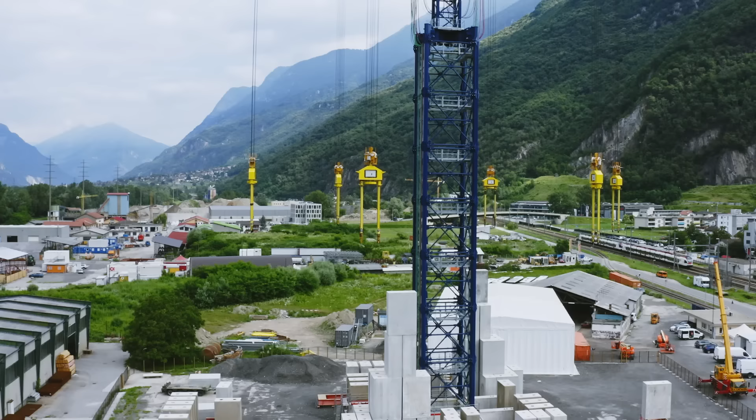We really wanted to innovate in a way so when you combine with wind and solar, you could actually be competitive and even cheaper than fossil fuel. And this really drove a lot of our innovation to come up with a combination of conventional physics technology for speed with some of the latest innovations in AI, software, and material science to create an energy storage breakthrough.

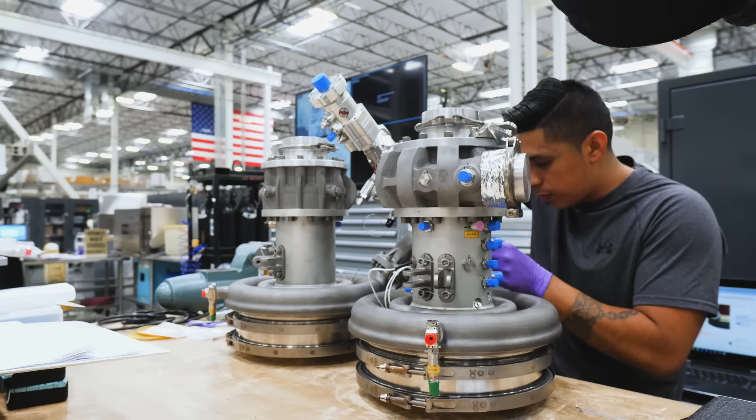A global technological revolution is underway. We think in the next 10 years, you'll see more innovation than we've seen in the past 50. Driven by passionate, dedicated individuals intent on shaping a new world. I want to create something new. I want to create something that gives me the sense of creating new life. This is why I'm here.

A greener world. This is the last call to action, that we have to develop the solutions that are protecting our planet. A better world. I have a family, and when I think about the life I want them to have and their children to have, I want them to experience the world where they can travel and live without worry, and that gets me up and going every day.

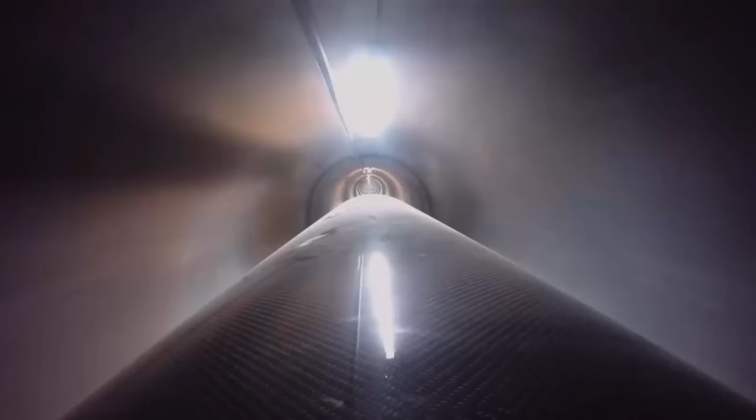Together, they are pushing engineering to its limits. Human creativity is the most tremendous power, and if you set a target, things that you never thought possible become possible. Creating extraordinary machines that can help the planet and humankind in the future.

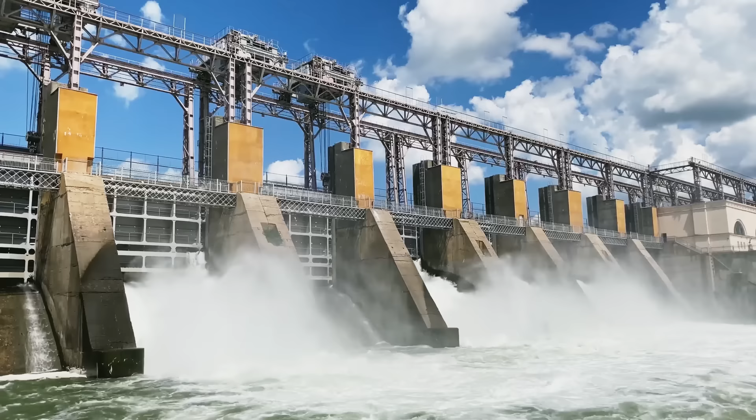Engineers are transforming the way we power the world, replacing old carbon-intensive technologies with clean, renewable sources of energy. And the speed of change is unprecedented. The energy transition that's happening at the moment is a complete paradigm shift.

Rather than big, centralized thermal generation, burning coal, burning oil, burning gas, we're now decentralized, solar PV all over the place. Wind and solar, which are now commonplace, really, they were almost non-existent. They were just a minority thing 20 years ago. But the meteoric rise of renewable energy has consequences for our electricity supply.

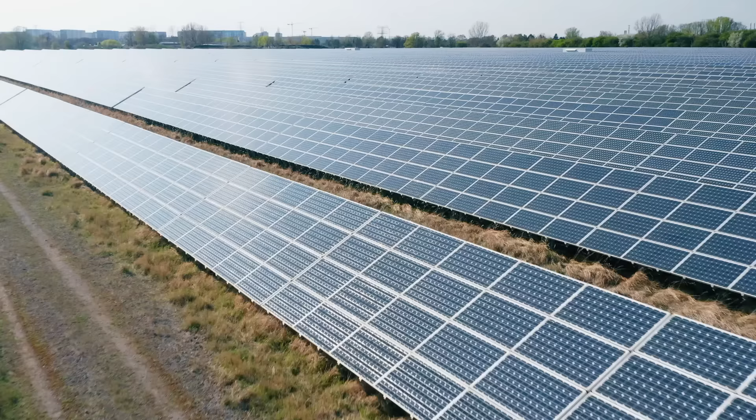While coal and gas-fired power stations can generate electricity whenever you need it, renewables are intermittent by nature. So we need a backup plan for when the wind stops or the sun goes down. So the solution to intermittent power provided by renewable energy is to provide power quickly using energy storage devices.

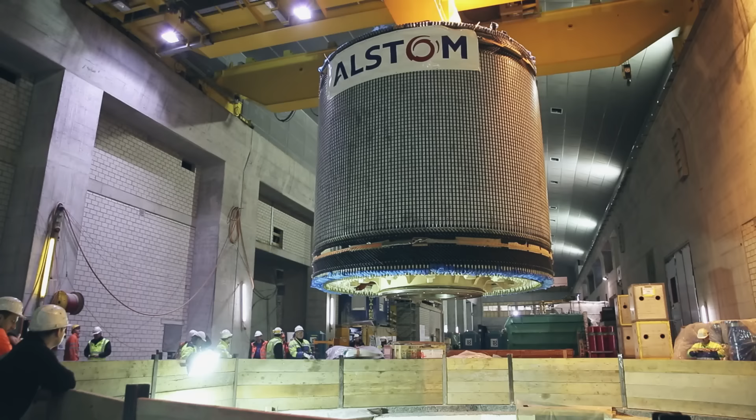Teams of engineers are searching for ways to store green energy with mechanical batteries, so that when extra power is needed, these devices can bridge the gap instead of relying on more polluting sources of electricity.

The ultimate solution really is to have much, much more energy storage built into the grid, so that at times when there's a surplus of energy, such as when the wind's blowing very strongly and the sun is also shining, one can save energy and store it. We're going to need a lot of innovation for new technologies to be able to store this energy so that renewables can generate and we can utilize that when the grid needs it, when the demand is.

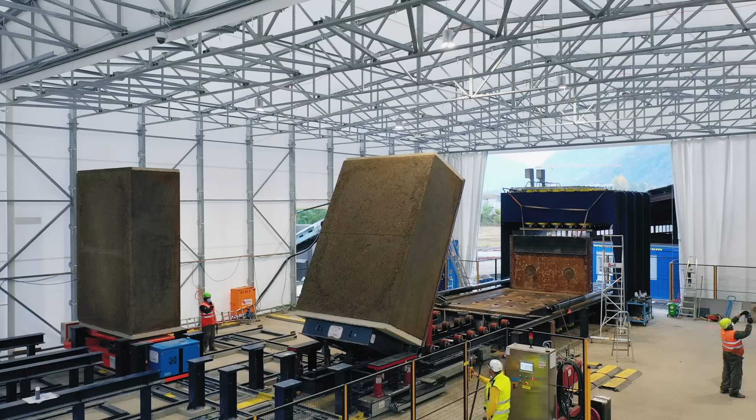The success of the green energy revolution depends on these engineers and their marvelous machines. If we were to keep increasing the amount of renewables on the grid, but we didn't implement energy storage at the same time, our grids will start to get unstable. We'll start to have more and more frequently periods where power wasn't available to us. Already, there are ominous signs of what a future might look like without enough energy storage.

In August 2020, California was about to experience a glimpse of this potentially devastating future. The most extreme heat wave of recent decades was wreaking havoc on the western United States. Elliot Mainzer, CEO of the California Independent System Operator, was paying close attention to the weather.

August of 2020 saw a heating event that hadn't been seen in many, many years. It was simultaneously extremely hot in just about every part of the western United States, with temperatures well into the 100 degrees in California and in many parts of the region. It was what we've referred to as a heat dome that sat over basically the entire western United States.

Then, sweltering Californians were suddenly confronted with another rare event. From 6:30 p.m. on the 14th of August, their electricity was suddenly cut off. It was the first time that California had experienced any types of rotating outages from a shortage of electricity in 20 years. This shortage may seem surprising, as California has invested heavily in green energy generation.

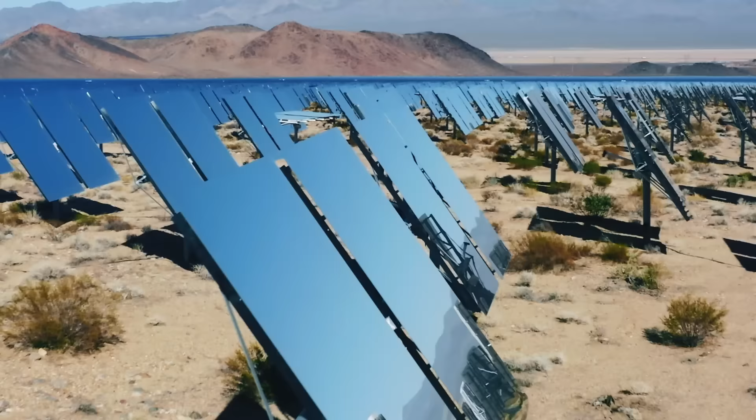In fact, during the spring, they have so much solar power, they export it to neighboring states. California is, first and foremost, very blessed to have a very significant solar energy resource. We have over 15,000 megawatts of solar operating on the high voltage grid, and also behind the meter, a lot of rooftop solar in California.

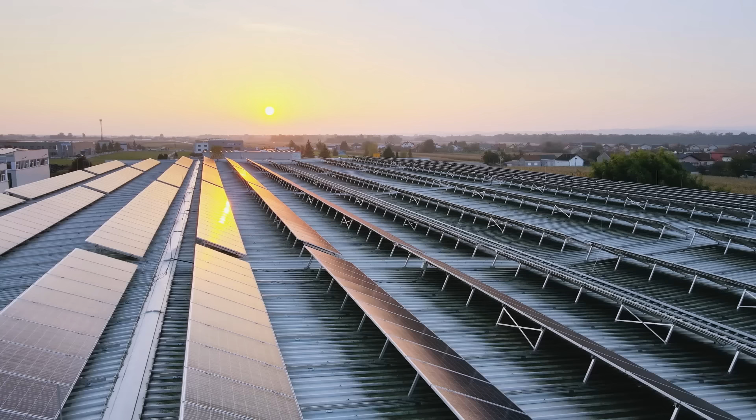So, with enough solar panels to power nearly every household, why did California run out of electricity during a heat wave, when there was plenty of sunshine? The answer was all in the timing. As the sun went down, power-hungry air conditioning systems stayed on, so the supply of solar power fell while demand for electricity remained high. In the evenings, California often imports surplus electricity from neighbors, but this time, they couldn't rely on other states.

It was so hot in these other areas that they needed that electricity for their own customers and didn't have as much surplus to sell into California. And that put us into a really stressed situation during a time of the day when we simply don't have enough capability to ride through those types of conditions. Planned energy shutdowns were the only solution. The result was hours of blackouts for 2 days, affecting nearly 500,000 people.

If California could have stored more of the solar power generated during the day to use in the evening, the crisis could have been averted. When solar panels produce more electricity than is being used by homes and businesses, the surplus energy can instead charge batteries. Then, when solar panels are generating less power than is needed, the batteries can discharge their electricity to the grid, making sure there's always enough for everyone.

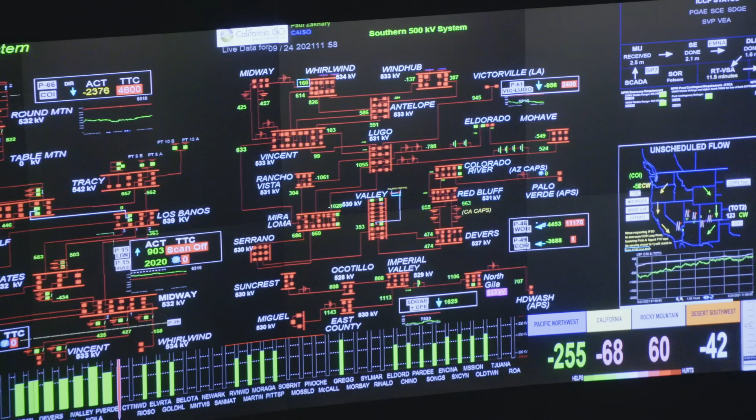Since the blackouts, California has been investing heavily in batteries, but that won't be enough. Today, the primary battery storage resource on our grid are 4-hour lithium-ion batteries. And they are going to continue to grow in scale and scope here in California. But they are not going to be sufficient on their own to carry all of the load of the transformation. The state's capacity has increased tenfold to 2.5 gigawatts. But Los Angeles alone uses 6.5 gigawatts. And lithium batteries can't provide power for long enough to get through the night.

We are going to need longer duration storage. You want a diversity of supply. You don't want to have such a dependence on a single technology. California is ahead of the curve. But all over the world, renewable energy is growing fast. Without a revolution in energy storage, the world faces mass blackouts.

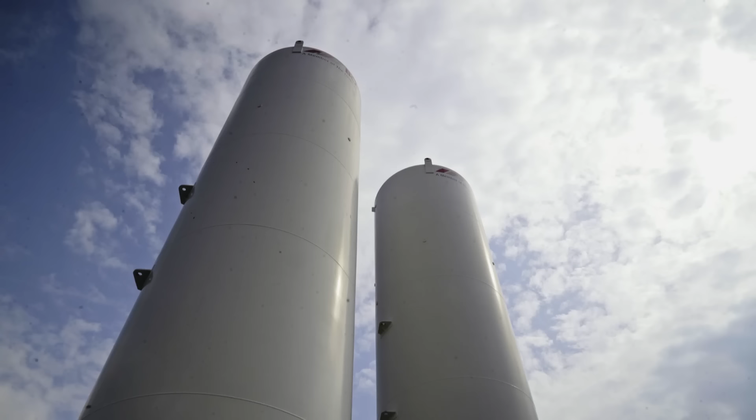Electricity grids need energy storage that is cheaper than fossil fuels to be competitive. They need them to be long-lasting to provide power for days or even weeks. They must also be fast-reacting to respond rapidly when the demand spikes. But above all, they need to store vast amounts of energy to help the world switch over to renewables.

One nation that's attempting to build a giant energy storage system is Switzerland. The Alpine country boasts over 600 hydroelectric plants. But this know-how in capturing energy from water is being taken to the next level here at Limmern Dam, to build a huge water-powered gravity battery known as a pumped storage plant. Deep inside the mountain, a turbine hall will connect Lake Limmern to Lake Muttsee, 1.5 miles above sea level. A 2,000 feet difference in height between the two reservoirs will allow them to store energy.

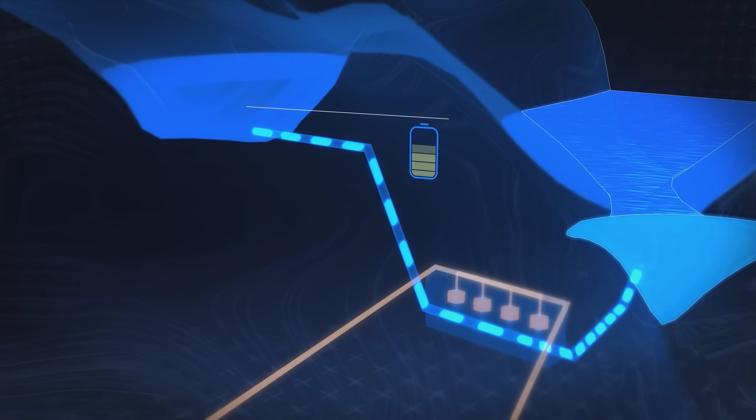When there's surplus electricity available, the gravity battery can be charged by pumping vast amounts of water upstream to fill up the lake. The gravitational potential energy of the water in the upper lake can be released to generate electricity whenever it's needed. The pumps will then rotate in the opposite direction, acting as turbines, generating electricity and sending it to the grid. The engineers aim to generate enough electricity for the Limmern Dam to supply up to 1 million Swiss homes at peak power.

In January 2010, energy company Axpo started building one of the biggest batteries in the world. The project would be one of the most ambitious engineering feats ever attempted at such a high altitude. Overseeing the construction of this vast pumped storage plant was project manager Martin Hussler. This was a huge work which has to be done with a maximum of 700 people here, and they work together. It was a huge construction site.

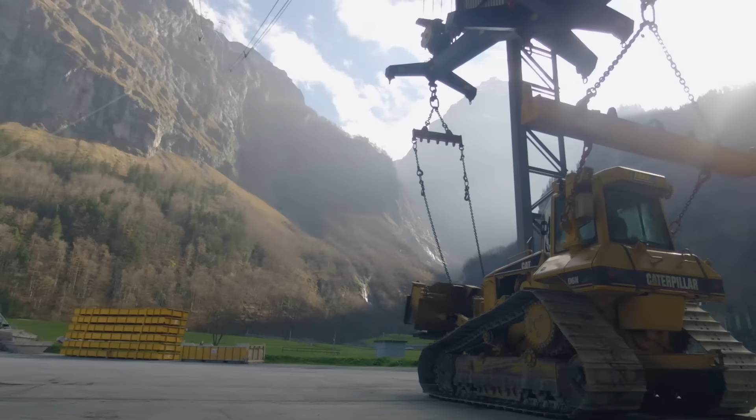With no road access permitted to this protected part of the Alps, the engineers had to find a solution to lift all the necessary building equipment to the top of the mountain. So the team built 2 cable systems, each spanning just under 1 mile, that could lift the equipment at 10 miles per hour. We had 2 aerial cableways. The first cableway has a capacity of 40 tons, and the second cableway has a capacity of 30 tons. And all the machinery was taken by the aerial cableways to the Lake Limmern and to the Lake Muttsee.

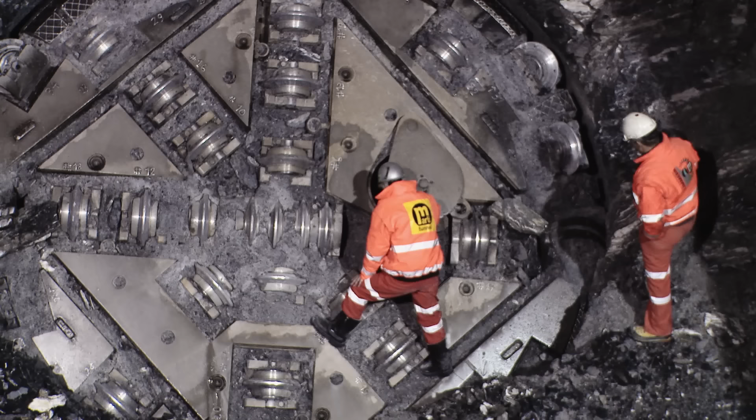Next, they had to dig through a wall of rock to the center of the mountain. Boring machines excavated a 2-mile-long access tunnel through which the team could bring the equipment from the top of the cableway. Then the team used explosives to excavate the caverns before collecting up the rubble to make concrete for the project.

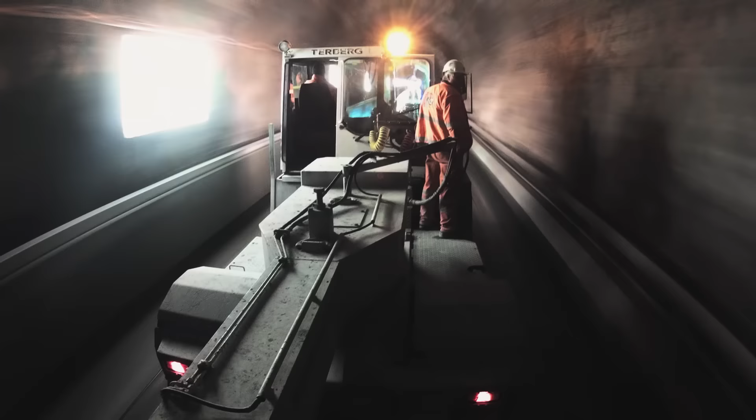The rocks excavated from the caverns were crushed and prepared for the concreting, because this was the main material for the concreting of the liner in the cavern. The builders produced enough concrete to build 700 suburban homes, and even more concrete was needed for the dams. Most of this crushed stone was transported with the aerial cableway to Lake Muttsee and was used for concreting of the gravity dam.

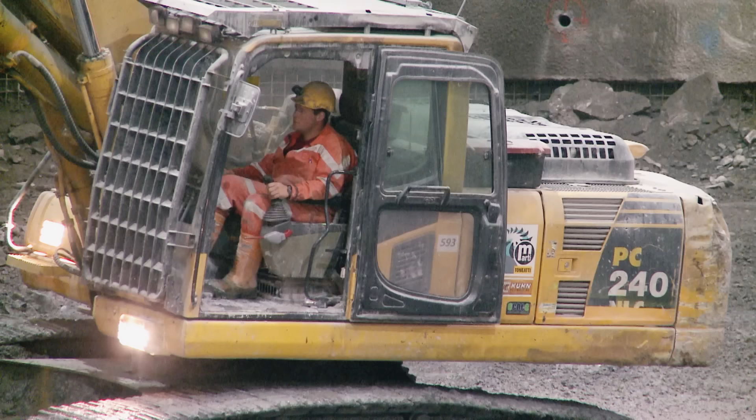This structure will be the longest in Switzerland, and it will triple the capacity of the lake. The altitude of the dam is approximately 2,500 meters, and this is the highest in Europe. So this was also a logistical challenge. The team had to excavate 2 main caverns out of solid rock: a powerhouse cavern for turbines and generators, and a second cavern to house the transformers.

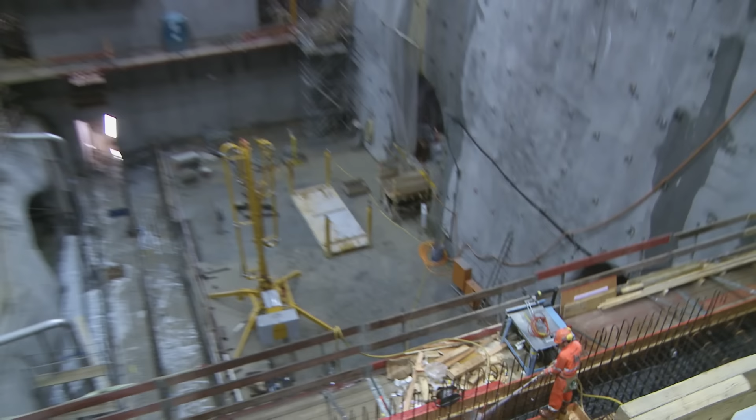Then they had to line both caverns with concrete and build arches to reinforce the structure to withstand the weight of the mountain above them. The whole plant, with all the tunnels, was approximately 400,000 cubic meters. And as a comparison, our main cavern is approximately 15% larger than the interior volume of St. Paul's Cathedral in London.

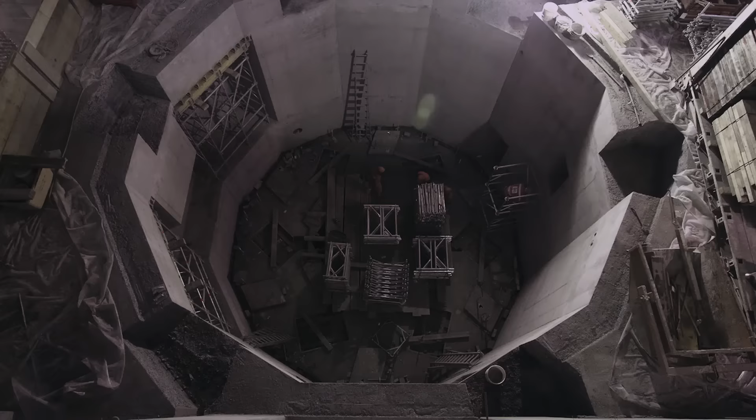The cavern was finally ready for the transformers to be installed, but there was an issue. They weighed over 200 tons, which was too heavy for the cableway. The solution was for the engineers to fit a funicular rail system into an access tunnel, which could lift up to 220 tons. Then the team built 4 pits for the turbine and generator units. These would weigh too much for even the funicular, so instead they meticulously assembled them in situ.

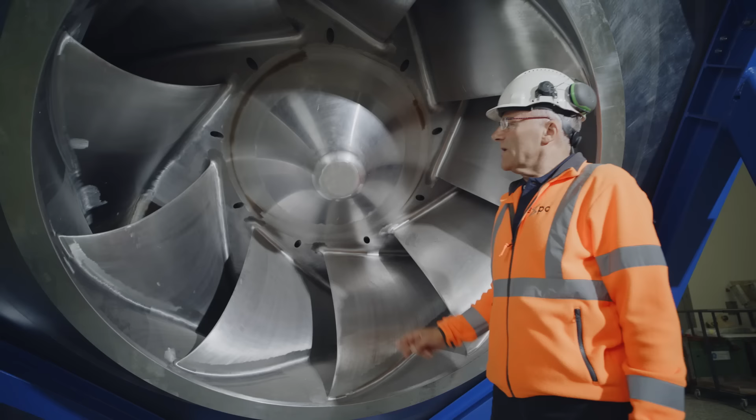First came the enormous pump turbines. As these blades rotate, they transform the kinetic energy of the water into rotational energy. The runner has a power of 250 megawatts, and its design has 9 blades. In pumping operation, the runner turns in this direction, and the flow goes through these channels to Lake Muttsee to store energy. This allows us to fill Lake Muttsee in about 40 hours.

In turbine mode, the water is coming from Lake Muttsee, going through these channels, and the water flows through this channel out and is going to Lake Limmern. And for all 4 runners, we have a total discharge of 160 cubic meters per second. That's enough to fill 4 Olympic swimming pools every minute. Finally, the team assembled the generators, each weighing 360 tons.

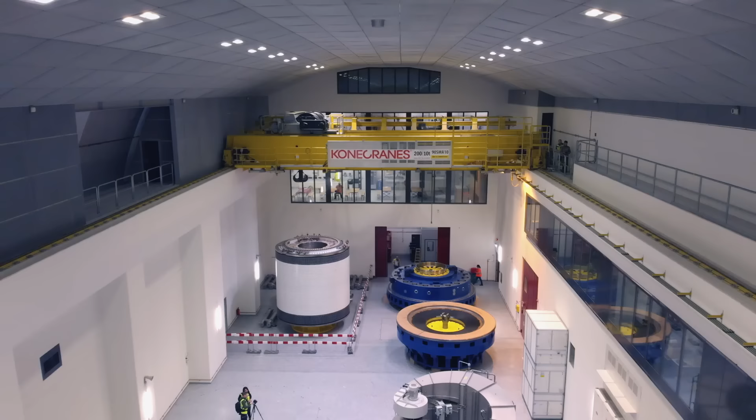To generate power, operators open the valves and water flows into the turbines. The generators convert the rotational energy into electrical energy. The Linth-Limmern pumped storage site took 10 years to build, and it came online in 2016. The feeling after we had successfully done the project was great, of course, because this is a huge project. It takes a long time to fulfill all these requirements, and we are still working on it. It can now provide a massive 1 gigawatt of power on demand, the equivalent of a typical nuclear power plant.

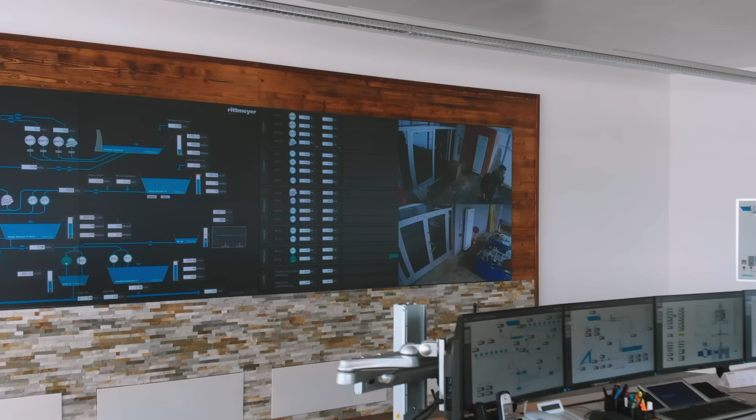It is very important to have this pumped storage power plant because we are able to store a large amount of excess electrical energy produced by solar and wind power. The Limmern Energy Storage Plant can provide Switzerland with green power even when the sun or wind drops. Pumped storage gravity batteries like this were first developed here in Switzerland in 1907. Today, they're the leading form of energy storage worldwide, with some of the biggest in the US and China. But they take a long time to build. So as renewable energy grows rapidly, other solutions will be vital.

Pumped storage is near its limits now for several reasons. The main reason, of course, is that you need a convenient mountain, and convenient mountains usually don't exist anywhere near centres of population where storage is most needed. It also has other problems in that most pumped storage systems are quite slow to respond. To get a lot of water flowing takes time. So some of the grid services which are needed demand something which can respond in under a second, for example, and certainly a pumped storage system can never do that.

The supply and demand of electricity can change very suddenly, such as the power from a solar farm when a big cloud drifts overhead. So in order to keep the grid stable, engineers must build systems that can respond rapidly.

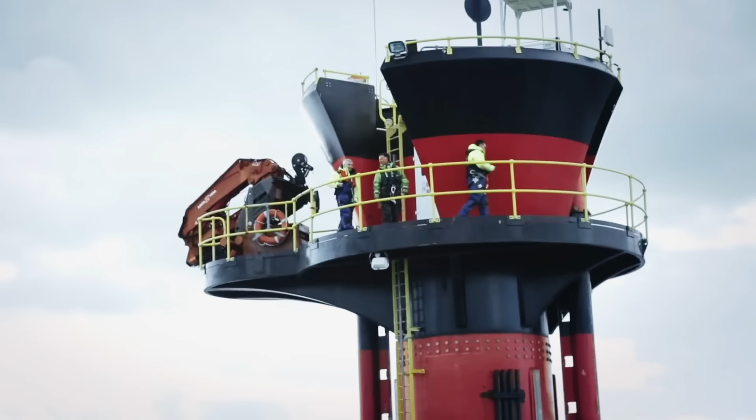Inventor Peter Fraenkel is a pioneer of renewable energy, creating novel wind turbines and the world's first commercial-scale tidal turbine. So he's well placed to understand the need to solve this problem. I decided I'd like to get into energy storage, and I was looking around for some clever way of ideally using mechanical engineering of storing energy.

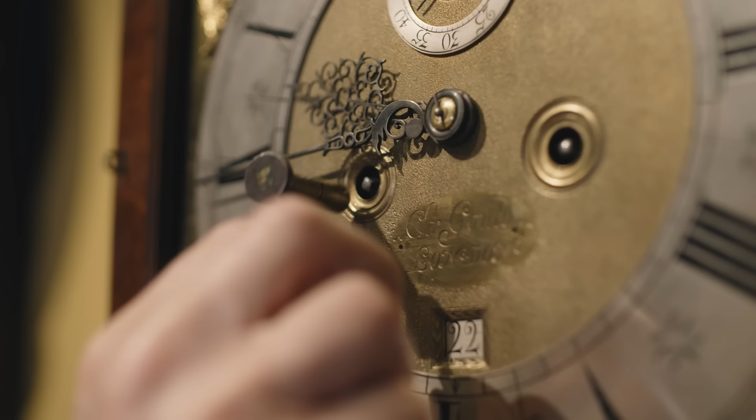Peter was fascinated by the mechanism inside a grandfather clock in his home, similar to this one, a family heirloom. Basically, it has some very heavy weights, and those weights, under the influence of gravity, would like to fall down, but they can't because they're hanging from wires connected to the mechanism. So if I put the key in and wind the handle, this slowly raises the weights, and the energy from my muscles goes into the weight, and the weight then will be energized, basically, and ready to return the energy

to the clock. This clock is 300 years old, and actually you could leave these weights for another 300 years if you did nothing else, and no energy would be lost. But if we start the clock, so the pendulum swings, now the clock has started to tick, and both the weights, in fact, will slowly descend. So, it's an incredibly durable form of energy storage.

Peter's idea was to scale up the mechanism in a grandfather clock to store huge amounts of energy. To be a success, it would have to respond in under a second. To turn the concept into reality, Peter founded Gravitricity. He wanted to build energy storage units underground. Peter appointed engineer Miles Franklin to oversee the project in Scotland, as he had to self-isolate in London.

To store a lot of energy, you need either a lot of mass or a lot of height. So in order to get to very interesting levels of energy storage by lifting masses, it's good to go down. It's also then, once it's underground, it's hidden. So you could do it under a city, under a football pitch, wherever you liked, in order to store energy, and then without having problems with wind and weather and all these other things. And so we started to look at both existing mine shafts that are no longer being used for mining, and also the idea of sinking new shafts specifically for energy storage.

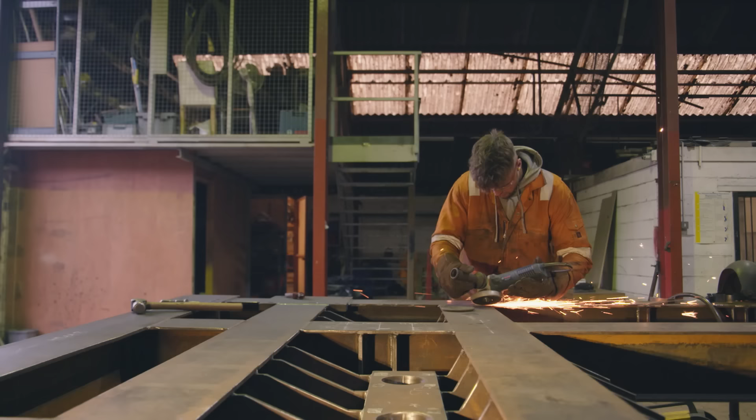Before going underground, Miles was in charge of building a tower prototype to prove it could provide power rapidly. The team filled 2 steel containers with over 50 tons of high-density ballast. This would store energy when lifted up and release it when lowered down. The 30-foot tower was then lowered onto the containers and secured. There were some scary moments along the way when we're moving very heavy things and lifting them, so there's a sigh of relief when they're all in place.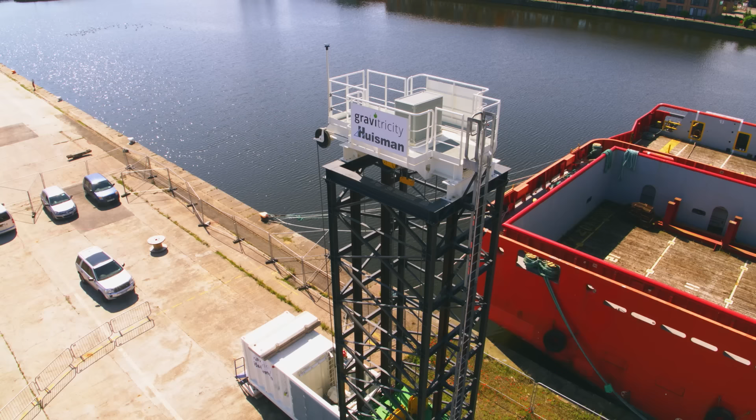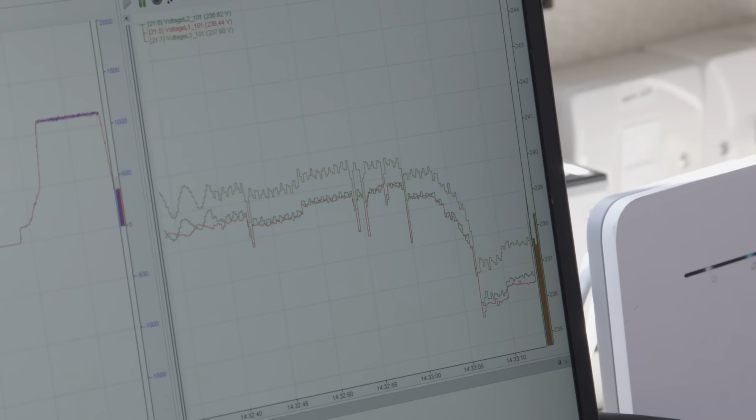Once it was all assembled, they were ready to store energy for the first time. We got to the moment we were going to lift the weights. We had quite a lot of the engineering team on site. So yeah, there was some tension. They used power from the grid to raise the weights and charge the system with energy. For that lift, it's the first time that the whole structure is supporting the weights. And you would expect, as you lift, some strange noises as the structure kind of finds its place. When the weight reaches the top of the tower, the system is fully charged. We can stop, we can pause, we can hold that energy for as long as we want.

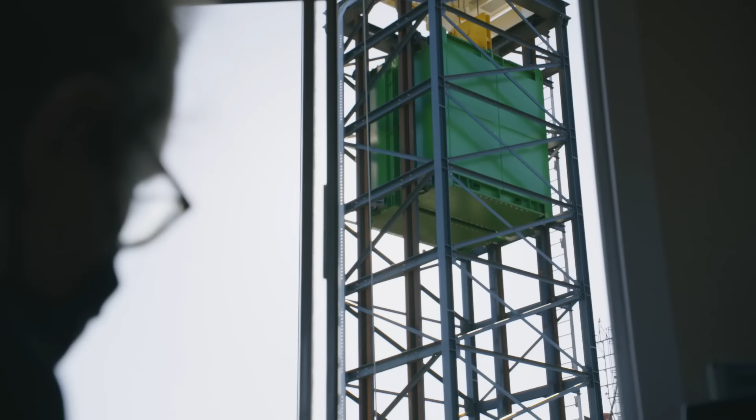But how fast can they return power to the grid when it's needed? Senior test engineer Jill McPherson knows how important that is. Right now we're going through a transition from using fossil fuels towards using renewable energy to generate electricity, but that means that the grid is less stable. With conventional power, we have these big generators that provide a lot of stability to the grid, but with renewable energy devices, they don't really provide that. So we wanted to be able to go from 0 to full exporting power within a second so that all the devices on the grid can operate safely. All systems are go.

To generate back to the grid, the weight is lowered, the weight pulls down on the steel rope, which turns the winch, and then via the gearbox, turns the motor. The motor acts as a generator, so then we're putting power back into the electrical cable via the power electronics straight into the grid.

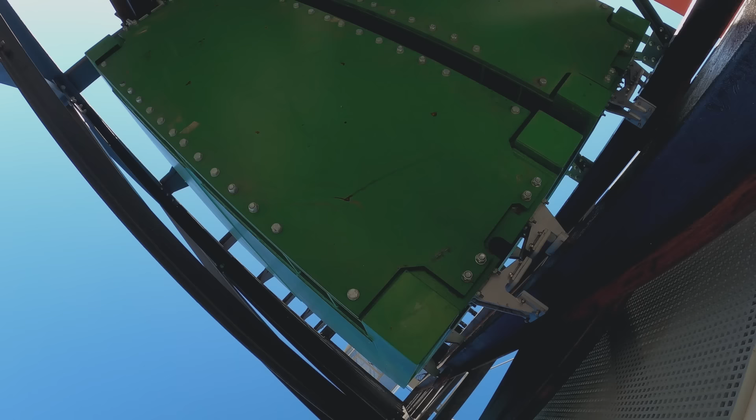The tower had successfully generated electricity, but for the first few seconds, the power supply had fluctuated too much. And so what we find is when we accelerate really quickly, the weight starts to bounce up and down, and that bouncing weight becomes a variation in the power. So what we need to do is find solutions to be able to accelerate really quickly, but then have that power output from our system quite smooth. So we need to try and find some way to fix that.

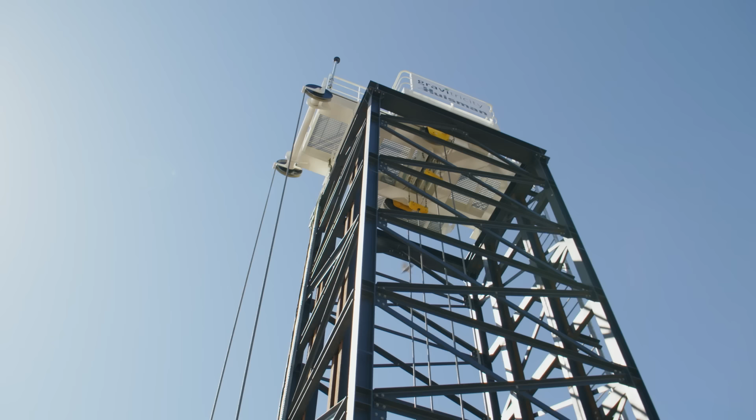The team must find a solution to generate a smooth power supply more quickly when the weight starts to drop. Although the concept may seem simple, smoothly lowering a weight of 50 tons in a fraction of a second involves intricate mathematical modeling. Analyzing the dynamics of the weights and the movements and then designing them is actually quite complex. And so that was something that took us a while to get right.

1 month later, Miles and Jill have a plan. We're testing. After many simulations and tests, they think they've figured it out. So 3, 2, 1, go. If we want to go from 0 to full power, but have smooth power at the maximum power, then what we could do is apply a force that cancels out the tension oscillations in the cable, and then that corresponds to smoother power.

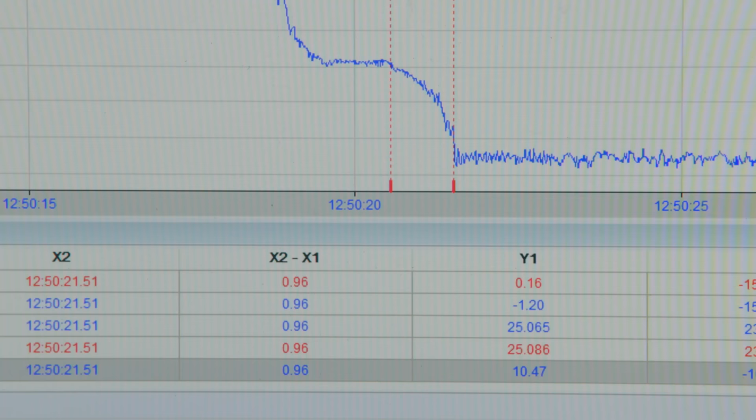Right. To find out if it produced a useful source of power in under a second, they must analyze the results. In this last set of tests that we just did, you can see that the power is much more smooth. It's a straight line, and that's what we're looking for. We went from 0 to full power in 0.96 seconds. Gravitricity's prototype has proven it can respond rapidly to the demands of the grid, a significant improvement over pumped storage, which can take minutes.

In July 2021, Peter Fraenkel was eventually able to make the long journey from London to Scotland to see the tower for the first time. A bit better than the grandfather clock, yeah. Doesn't have such a nice face on the top of it, but yeah.

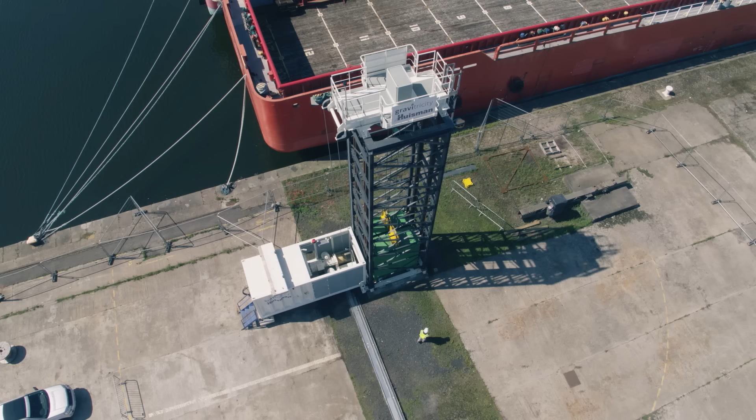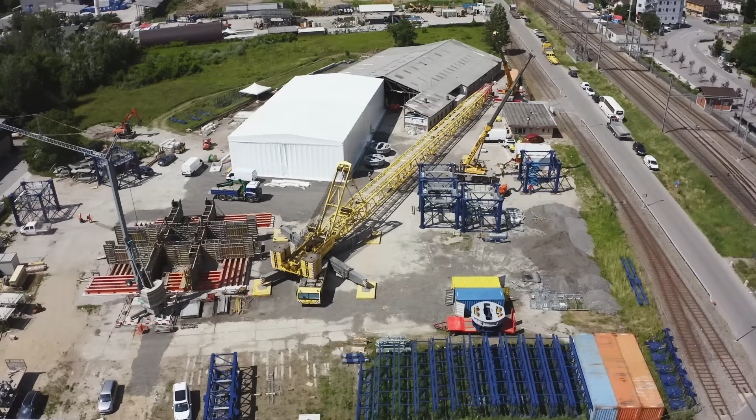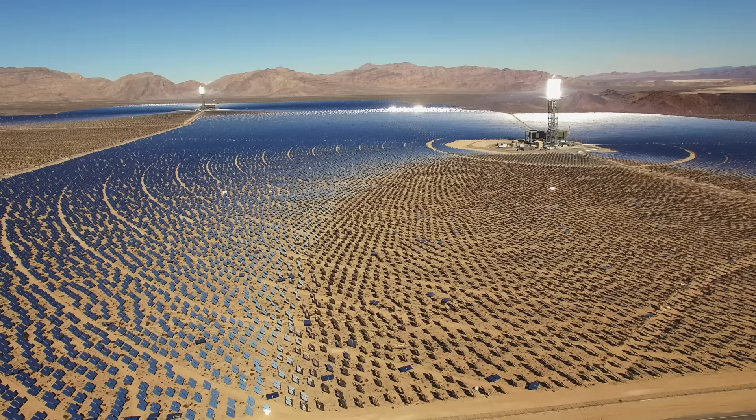Meanwhile, back in Switzerland, a startup called Energy Vault are building another type of gravity battery. The goal is to store energy as cheaply as possible. CEO Robert Piconi understood that the only way to move to 100% renewable power was to undercut the price of electricity generated by fossil fuels. You have to be able to essentially compete with something that's about 5 to 6 cents a kilowatt hour. And the good news is solar and wind now is just a few cents, 1 to 2 cents a kilowatt hour. So the economics really work there. You therefore have to target storage that must be between 3 and 4 cents to have something that at least is on parity with fossil fuel, and therein lies the challenge.

To meet this challenge, the team came up with a specific design. The Energy Vault 1. A crane with 6 arms that could lift heavy bricks and stack them on top of each other to store energy. Then, to release that gravitational energy, the cranes lower the bricks back to the ground one by one. By building a tower made of thousands of heavy weights, they could store large amounts of energy and therefore bring down the cost. And by using mostly tried and tested machinery, they could build it quickly.

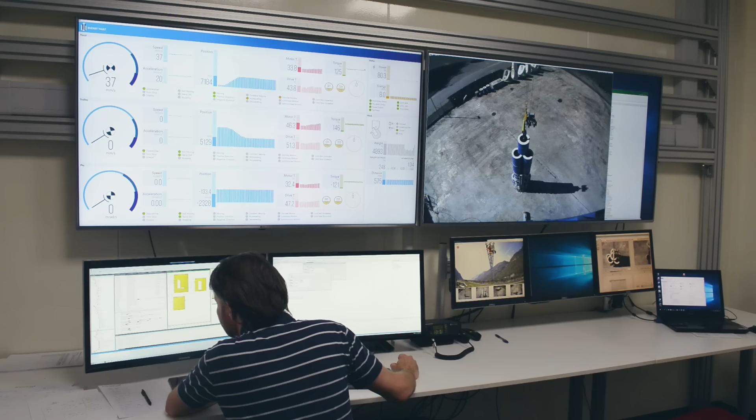But first, they had a thorny issue to tackle. So they built a quarter-scale system to try and find a solution. The problem is that when heavy objects are lifted by a crane, they can swing like a pendulum.

One of the main challenges we have in utilizing this system to move large objects is the environmental impacts on that object in movement. And it's a very important problem when you're moving large things like containers, for example, that are at the ports, and when the cranes are moving them, they will sway and impact the ability to precision place them. When we're moving around 35 metric ton bricks that we have to stack at height, it's very important that we be quite precise with that. And so that was one of the major challenges, was to solve for this pendulum effect.

When the trolley on the crane moves along the arm, the weight below starts to swing back and forth, making it almost impossible to precisely place the weight in its new position.

We had actually thought that the crane industry had solved this already for the movement of things in the ports and these large containers, but as we talked to other partners and suppliers in the space, it hadn't been solved, and so we had to develop the algorithm for that ourselves. And it's a very important algorithm because it's not only necessary for the precision placement of the brick, but also to deal with any unpredictable weather events, for example, a high gust of wind. So this was fundamental that we use software to solve this.

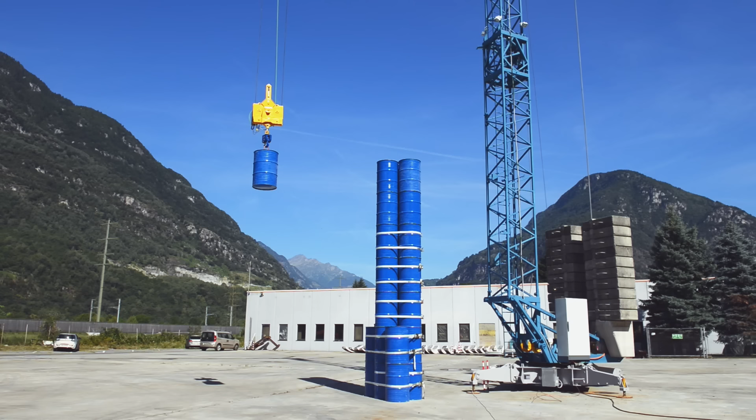So we took concrete barrels and utilized an existing crane that we modified to test the ability of software to cancel this pendulum effect. As the test began, an AI control system could predict how the weight was about to sway. It then instantly adjusted the movement of the trolley to cancel it out with an equal and opposite motion.

One of the most fascinating things is to focus up on the trolley and to see the back and forth movement in light speed so that concrete barrels maintained that consistent velocity. And just amazing to see that software at work and manifest itself from the modeling to reality.

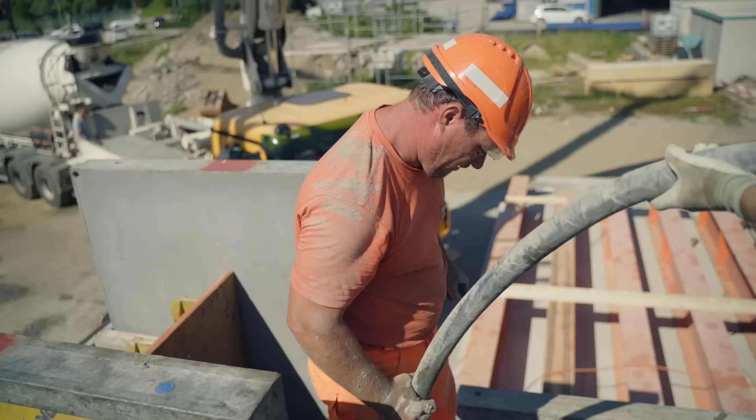In January 2021, work began on building the full-size crane. But this would be nothing like the cranes you might see at a construction site. After laying extremely strong foundations, the team assembled and secured the 7 sections that made up the 660-foot-high tower. In the meantime, another team assembled the 3 rotating platforms called jibs. Just one jib of the crane weighs 130 tons.

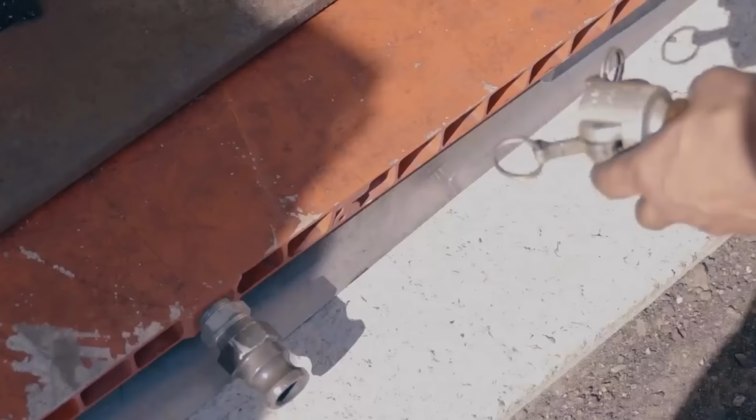So just to construct it is one thing, but then to maneuver it around the site, we had to use a special horizontally designed hovercraft system that could maneuver and shift from the shelter where it was constructed to a location where the 600-ton crane could be attached to that system and be able to lift that jib up so it can be constructed onto the crane itself at height. Just fascinating and amazing, and just a great job by the team to pull that off.

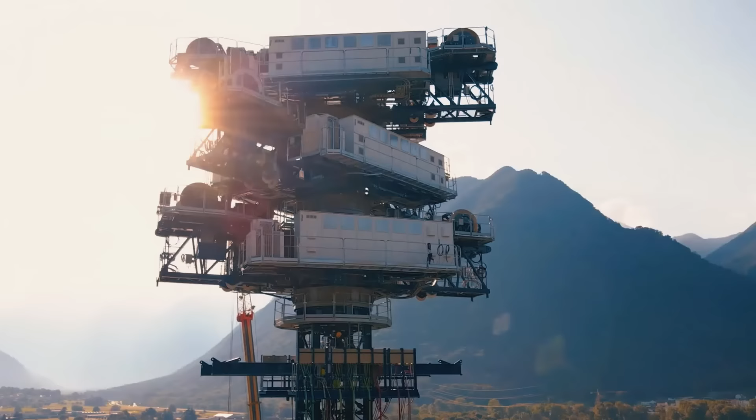The crane stacked the jibs on swing bearings on top of each other so they could turn independently. Once in place, it was time to assemble the arms which support the transport trolleys. Having enough arms of the crane with enough megawatt motors per arm, you could generate up to 5 megawatts of power and be able to essentially discharge that over a period of time, at least 6 hours, but ideally up to 8 to 12 hours, in a way that could be reliable.

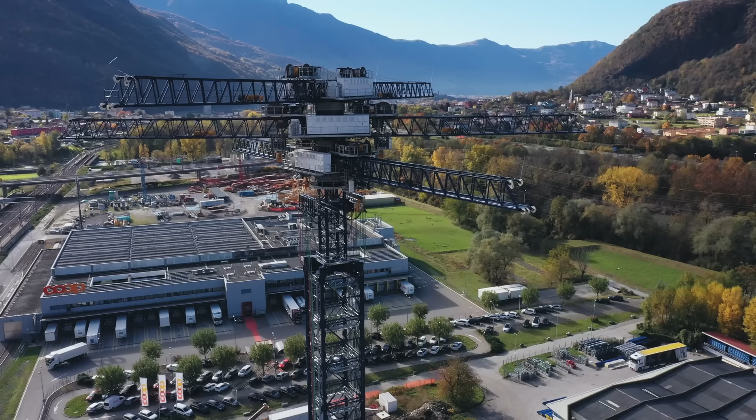While the multi-armed crane took shape, Rob faced a dilemma over how to make the 40-ton bricks in a way that was both cheap and environmentally friendly. So normally, as you think about making any dense weight object, one of the easiest materials to use is concrete. The problem for us in concrete were many. It was too expensive. It was also bad for the environment. Concrete production still represents 7 to 8% of the greenhouse gases. So this, again, required more innovation for us to think about how to solve that problem.

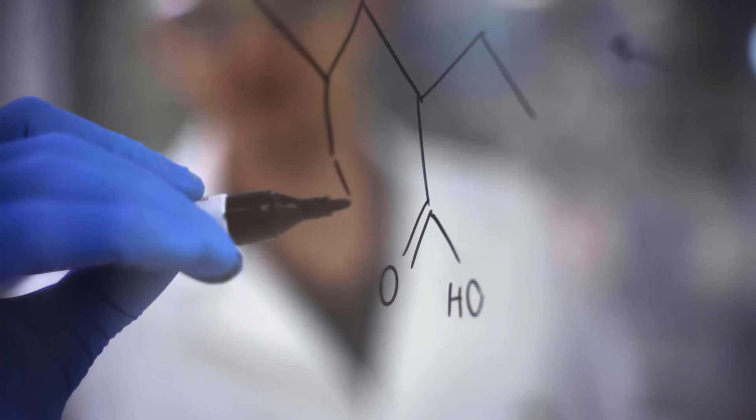They wondered if the solution might be a low-cost, plentiful material available at almost any site: soil. So Energy Vault approached a specialist in building materials, Cemex, to develop and manufacture their bricks. We had been working already on soil stabilization for some time. There are a lot of places where there are plans to develop a network of roads, sometimes in very difficult places. And the easiest way we thought was to be able to take just the soil there, dig it out, compact that material, and give it the ability to solidify.

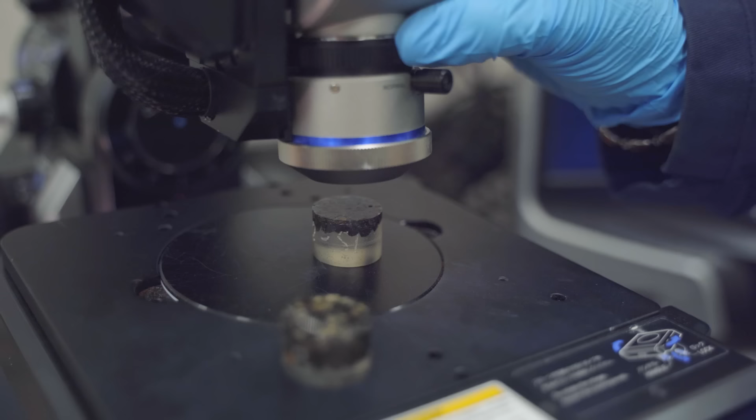To make the bricks, head of R&D Davide Zampini would need to adjust their process to make them even tougher. These blocks have to be designed to last 25 years or more. The conditions that the blocks would be subjected to are highly variable. I mean, you can have places where it's very hot, very cold, wind.

These blocks are being lifted and put down, lifted and put down. So they go through a lot of cycles of stress. Cemex came up with a mixture of soil, water, a small amount of cement, and two crucial binding components. First, a chemical glue. In terms of the strength, it has a lot to do with our chemical admixtures. You know, it creates a strong binding element, what we call like the mineral glue of the block.

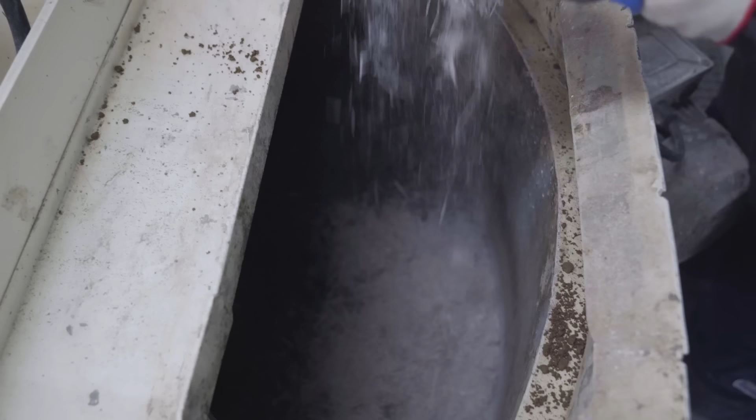The second component is glass fibers. Fibers are actually incorporated as a means to arrest any initiation of a crack that could take place. What we do with the fibers is make the material highly resistant, especially when it's under tension.

Cemex are now investigating an alternative source of fiberglass that could be even more environmentally friendly. Today we're looking at recycling the blades of windmills that create energy, so it's interesting now that the same element that is creating energy has to be obviously decommissioned, and we can recuperate the blades and process that material and actually incorporate it into the blocks.

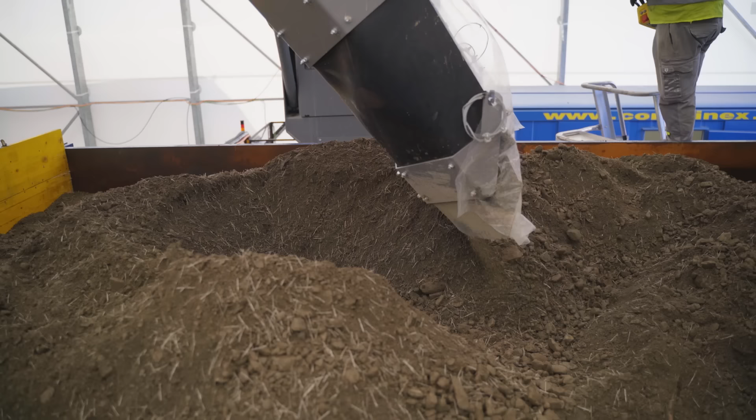This mixture is greener than concrete as it contains much less cement and avoids the pollution caused by heavy transportation. And crucially, it's also cheaper, which ultimately means a lower price for stored energy. But to make the bricks strong enough to be stacked 500 feet high, they needed one more step.

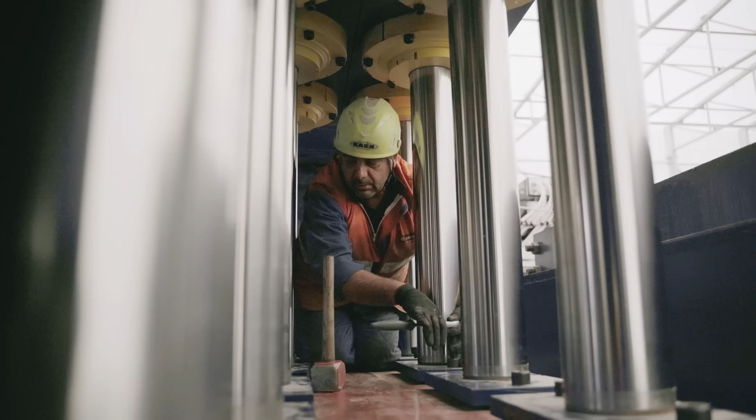When you are paving a road, you use a roller compactor. And here, actually, we said, okay, we would use the same approach because compaction is the best way to densify and make a material strong. But we needed to process the material in a different way. And that means we had to find a way to compress the material as much as we can, because the compression and the way the chemicals work further elevate the strength and the densification properties of the material, which are required to have the block survive those different conditions.

The pressure is applied by a custom-built machine with 40 powerful hydraulic pistons. You need a compressive strength of almost 7,000 tons. If you think about the weight of a car that's about 1.5 tons, and you were to stack the amount of cars needed to generate 7,000 tons of force, that stack of cars would be as high as Mount Everest.

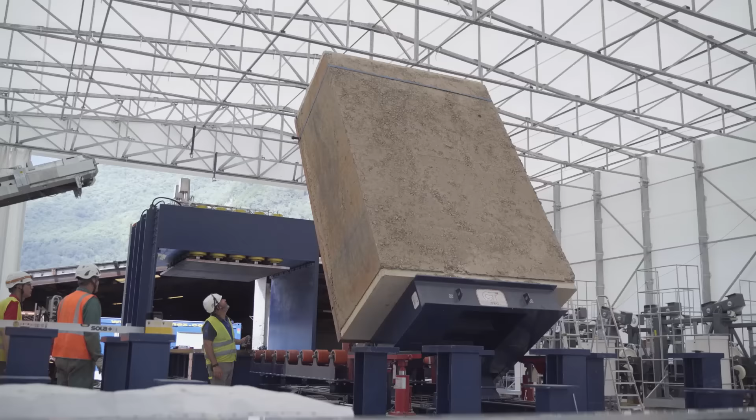After 10 minutes of this immense pressure, the bricks are good to go. Once part of the system, each one will be capable of providing a megawatt of electricity while being lowered by the crane, enough to power over 2,000 homes.

But before they stack the blocks into a tall tower, Rob needs to be sure it will be safe in all conditions. One of the parameters in our design was to be able to build this at scale almost anywhere. But there are locations where there's a strong need for renewables that happen to coincide with some seismic activity, like in California. And because of that, we wanted to do another focus around research and science to deal with the occurrence of seismic events. Energy Vault teamed up with Caltech and UC Berkeley to put the structure through its paces.

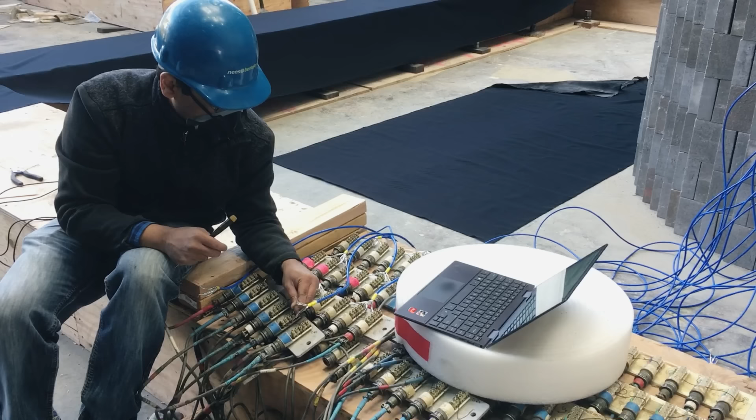After some small tests, they built a 1:20 scale model, 50 feet high, 7,000 bricks carefully stacked on top of the biggest shaker table in the US. You can imagine the atmosphere in the room as we had the tower constructed and we're about to turn on the shaker table. A lot of anticipation. The giant shaker table precisely simulated the 7.1 magnitude Ridgecrest earthquake that hit California in 2019.

As we got into the earthquake, what we saw is a vibrating of the system and a shuffling of these bricks, but the system never decoupled from the bottom and never resulted in a full collapse of the system. Just this tremendous round of applause in the room because our software modeling and prediction was actually going to be correct.

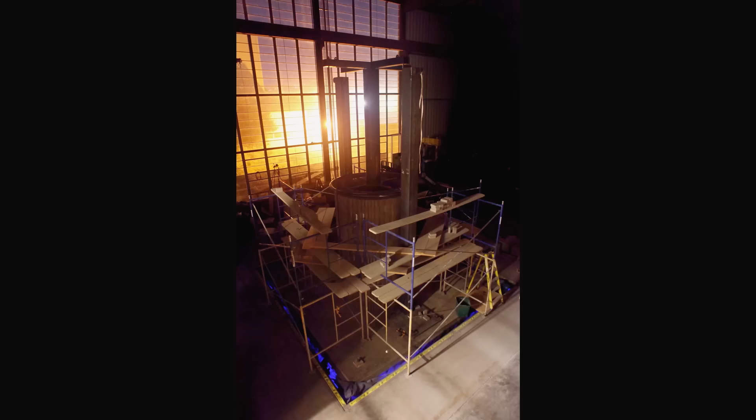So as we reconstructed the tower, we did hit it with a larger earthquake, the Denali earthquake, which is up in Alaska, that was a 7.9 on the Richter scale. Only a handful of locations around the world have experienced quakes as powerful as this. None in California have been stronger. While we were hoping that maybe it might withstand that level of earthquake, it did collapse, pretty readily.

Nevertheless, the tests had proved the structure could withstand the vast majority of earthquakes, which many conventional structures couldn't do. The implications for science and civil engineering of the fact that you could have a discontinuous structure not connected with standard mortar that could respond in a seismic event and shuffle and move and dissipate that heat and energy from a seismic event, and therefore withstand better than existing structures, was just a tremendous impact we felt like we were having, also well beyond even our energy storage structure.

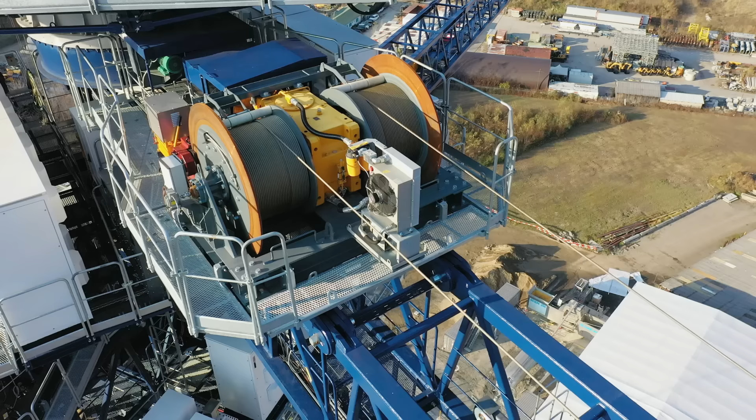With the safety of the system beyond doubt, the team were ready to stack the bricks. The holes allow the cranes to lift the bricks securely. Just amazing to see a 35 metric ton object coming off the ground and going at height 50, 60, 70 meters in the air. And not a new thing in terms of that amount of weight being lifted, but to have that done in an automated fashion and in a way that is going to be storing energy for the first time. So in this application, pretty cool to see.

Energy Vault expects to be able to generate electricity at a cost of just 6.5 cents per kilowatt hour by 2025, making it much cheaper than batteries and competitive with fossil fuel. The EV1 could be perfect for storing energy in the day and giving it back throughout the night. But we also need a way to store green energy that can generate power for days or weeks if the sky turns gray or the wind stops blowing.

Luckily, back across the English Channel, a company is engineering a new way to store energy that can provide power for longer periods. And instead of using gravity, they want to generate electricity from thin air. I like to think of it as an energy storage system which is a bit like pumped hydro, which is physically a very, very large system, but you can put it anywhere you like.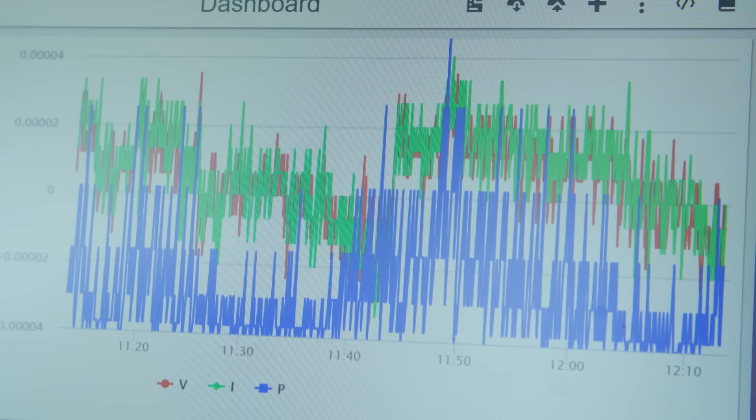Chief Technology Officer Gareth Brett has been developing the system at Highview Power for 12 years, working closely with Birmingham University in England. What we're looking for is economic means of delivering energy storage over a longer period of time than the typical electrochemical batteries. Lithium batteries typically provide electricity for up to 4 hours. Highview's goal is to store vast amounts of energy over a long period of time so they can then generate power continuously for days, weeks, or even months.

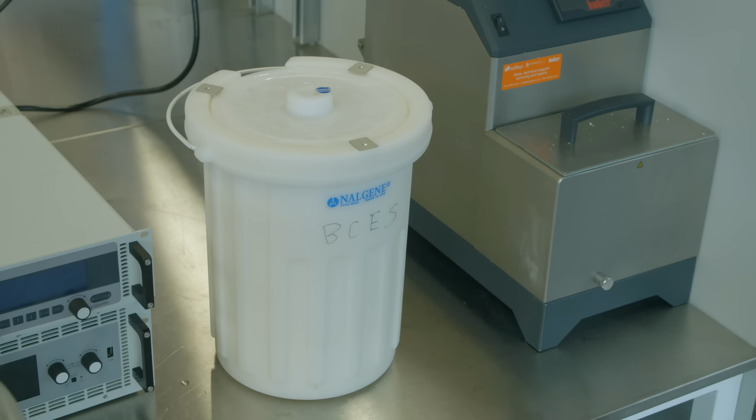To do this, they plan to store energy in the form of liquid air, which only takes up a small amount of space. I've just put some regular air into this balloon. In this white pot down here, we've got some liquid nitrogen. It's at minus 196 degrees Celsius. We're going to dip the balloon in and it will get extremely cold, and the air in the balloon will now start refrigerating, and you can see the balloon is collapsing.

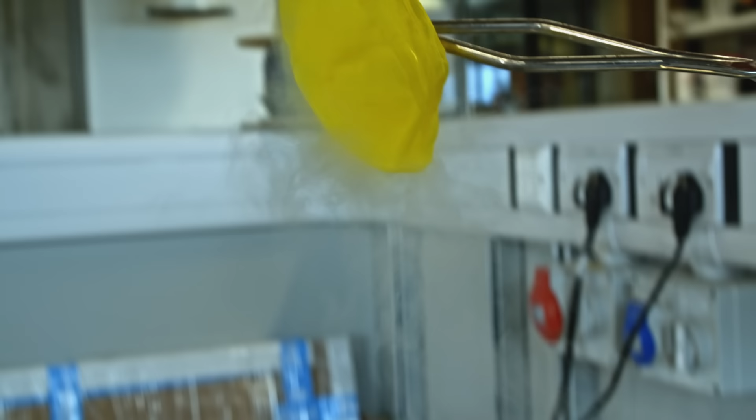That's because the air is getting colder, it occupies less volume, to the point where the air actually starts to turn into a liquid. So if we take that out, you can just see in the bottom, there's a little bit of liquid in the bottom of the balloon. It's about 1/700th of its original volume. As it warms up, it expands back into a gas.

If we did what we've just done to the balloon to all of the air in this entire lab here, it would shrink down to a volume of liquid only the size of this little oven, which gives you a sense of how much air you can store in tanks by keeping it as a refrigerated liquid. When power is needed, the system expands the liquid back to normal air to generate electricity.

This rig demonstrates how we get electricity back out of liquid air. So the liquid air comes up the pipe here. You can tell that the pipe contains cryogenic fluid because it's frosted up, and down into this white tank. And in there is a bath of hot water surrounding a coil of stainless steel pipework, and it gets evaporated back into a gas. As it warms, the liquid turns back to air, but at a very high pressure, as it can't yet expand in the pipes.

So at this point, we've got gaseous air coming back up this pipe, and that feeds up along this piece of pipework and down to our little air motor. As the high-pressure air finally expands, the fast-moving gas drives a rotor to spin rapidly, which generates electricity. So we're turning stored energy in the form of liquid air back into mains power that we're using to drive the fan.

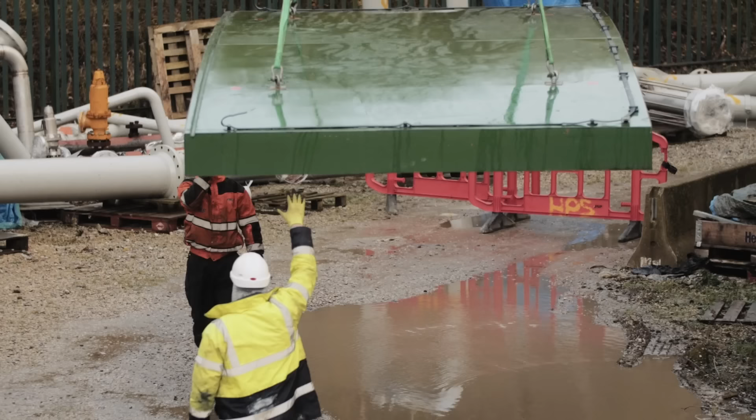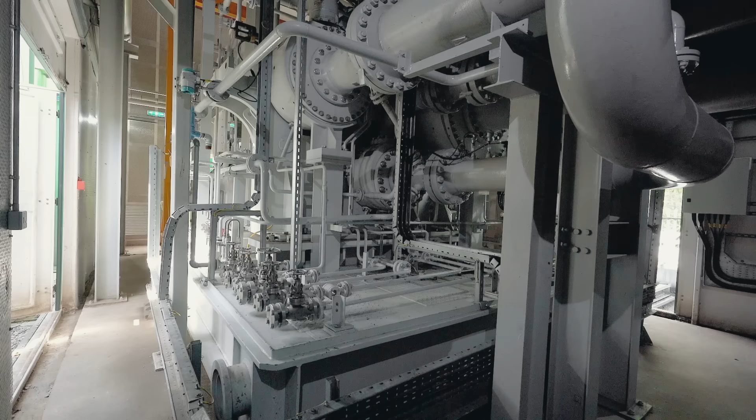In 2018, Gareth's team built a demonstration plant in Manchester, England, to prove the technology works on a commercial scale. It was a system that could use off-the-shelf components from major industries like the industrial gas industry, which is where we get our refrigeration systems from to make the liquid air, tanks available from the construction industry, and turbines and generators that, of course, come from the utility sector.

At Highview's liquid air storage plant, air is cleaned up, compressed, and put inside a large industrial-scale refrigerator, where it is condensed into cryogenic fluid at -320 degrees Fahrenheit. The cryogenic fluid is then stored in large tanks, which can hold enough air to fill the Royal Albert Hall in London. To release power, the cryogenic fluid is pumped to a heater, where it evaporates back into a gas before driving a turbine generator to produce electricity.

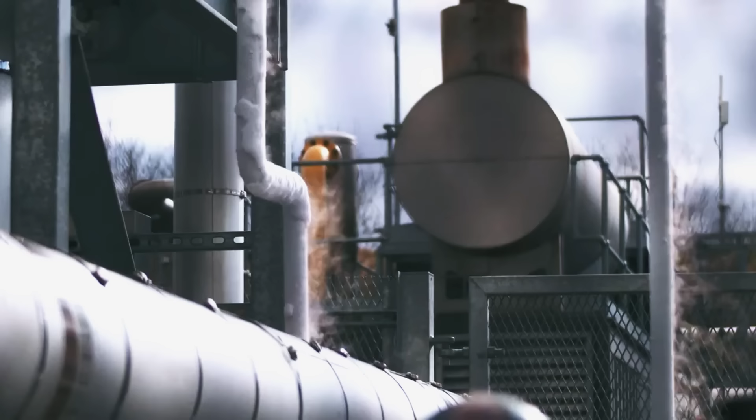The idea works in principle, but there's a fundamental problem: the efficiency. Refrigerating the air so it's cold enough to liquidize takes a huge amount of energy, and turning the liquid back to gas takes a lot of power to warm it back up. This means most of the electricity is wasted in heating or refrigeration, and only 25% gets returned to the grid. But Gareth's team relished the challenge.

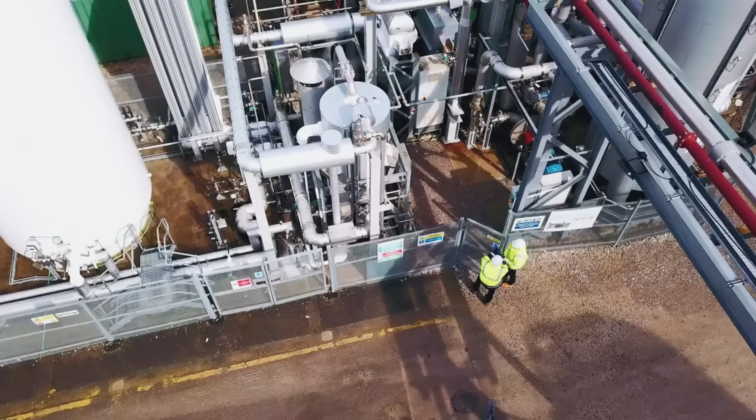One of the things that we've always sought to do is to improve the efficiency of the system. We hit upon the bright idea of, wouldn't it be a nice environmental thing to do, is to not pollute the environment by dumping heat into it, but hold on to that heat and then use it later when we want to expand the compressed air, when we're generating electricity. The heat generated by turning the air into liquid is stored and later reused to warm up the liquid air.

But that's not all. The cold generated by evaporation is also stored and later used to chill the air that's being liquidized. When we're expanding that gas, we capture some of the cold that the cryogenic fluid had, and we feed that back into the refrigerator to improve the efficiency of the refrigerator.

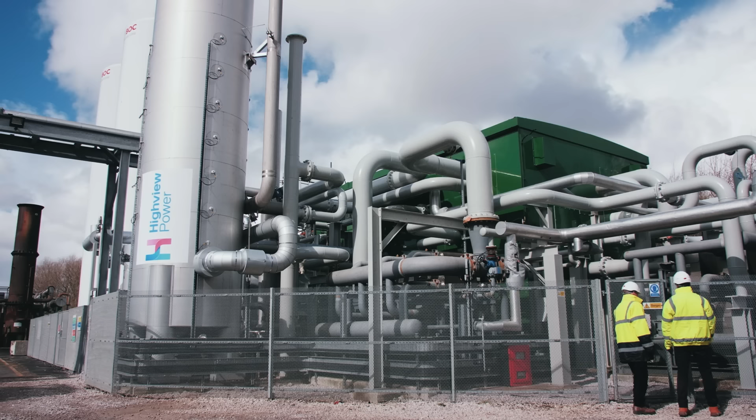Highview claimed that recycling the heat and cold boosts the efficiency hugely, to 70%, and that the system has other benefits. Highview, it's very kind to the environment. The working fluid is air. We take it, clean it up a little bit, store it for a while, then give it back. So no tailpipe emissions, no bad things used in its processing. It's about as good as it gets in terms of environmental footprint.

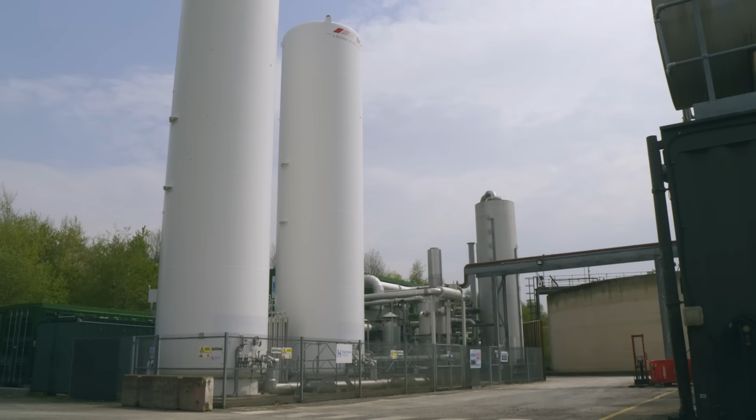But the key to Highview's long-term storage and almost endless supply of power is their cryogenic liquid tanks. Javier Cavada is a board director. These two columns that you see here, the white tanks, these are tanks that you find everywhere in the planet, in hospitals for liquid oxygen, in factories for liquid nitrogen, in houses, in industrial areas, totally commoditized. The ready availability of these tanks means it's cheap and easy to add more for a longer-lasting store of energy.

If you want to add more duration, you just need to add more tanks, but you don't need to add a new charging station, a discharging station. The more energy you are storing, the lower cost you need to store that energy. The economies of scale of this technology are simply amazing. Even seasonal storage of power is possible, where surplus solar energy in summer could be stored for use during the long, dark winter.

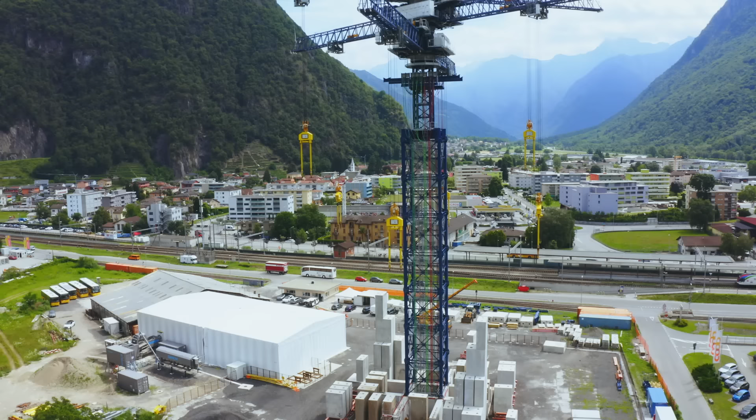Ultimately, electricity grids will need many different kinds of energy storage, depending on how much they need, how long they need it for, and how fast it must respond. I'd like to see Highview really widely deployed, but alongside other long duration and shorter duration technologies. So, you know, I'm looking for the broad adoption of energy storage, but not just that. I'd like to see technologies advancing, so we've got new competing technologies coming through that are better performing, cheaper, and quicker to deploy.

As we develop our full-scale systems, we really believe that can become part of this energy system as it changes and allow us to kind of fulfill these big ambitions of decarbonizing our grids really quickly. The energy transition is going to be massive over the next 30 years. It's going to be in the trillions of dollars, and therefore accelerating the need for the innovation to be able to deploy different technologies to reduce the greenhouse gases. Make sure we can hit net zero in 2050.

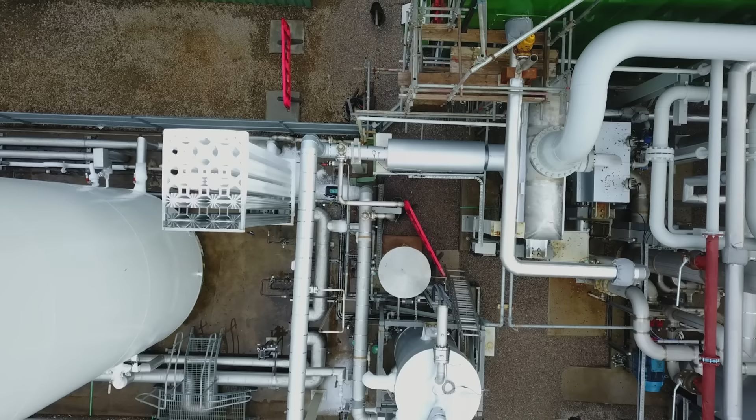That is still a gigantic challenge, but the more systems like ours that we deploy, the better the opportunity we've got of hitting those targets. Let's hope we can turn what looks like a train wreck into something that looks like plain sailing. By providing us with perpetual green power, these giant mechanical batteries could play a crucial role in saving the planet.